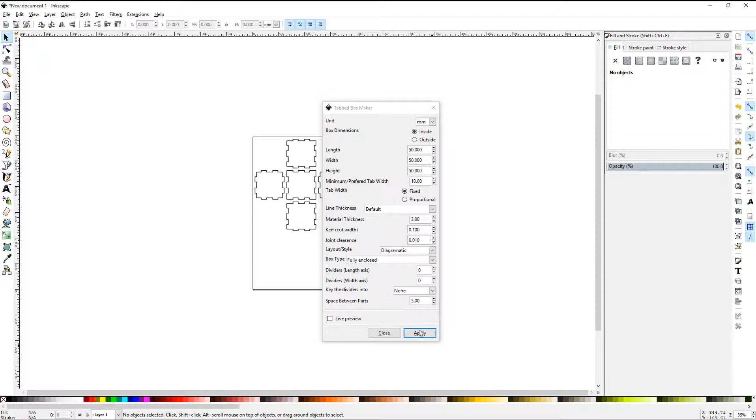So if I were to come here and make them a little further apart on the graphic, it's fine. I hit apply, and it made my box. So as you can see, there are 6 sides to the box.

Now I've already made the rest of the box, so we're just going to make a lid for this example - actually it really doesn't matter, but yeah, we're going to make a lid. I'm going to delete these other ones, and then - missed one. Come on, it's always the last one that gets you.

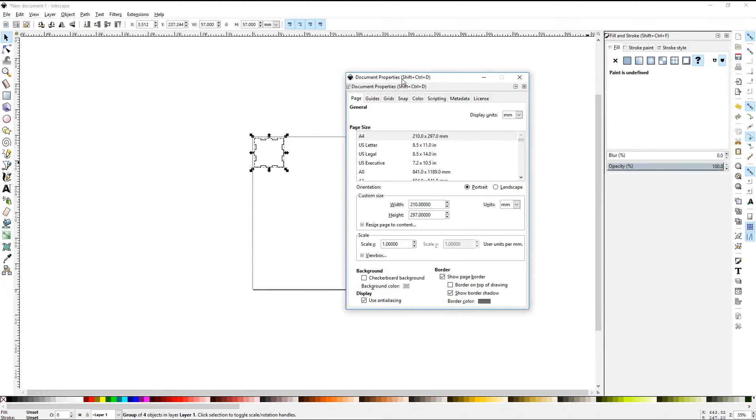So what I'm going to do is select this all, and right click it - I have to click on the line itself - and group that so I don't have to worry about it too much. I'm going to drag it over here, and then make my document the same size as the image. So I'm going to resize page to content, and now the whole document is the size of this thing. We're going to zoom in a little bit.

There's all kinds of alignment tools, and we're not going to get into the more advanced things about this - I'm going to do it just kind of quick and dirty. Basically what happens with the laser cutter is whatever is black will be raster engraved, which means it does a line pattern back and forth and engraves. Whatever is blue is going to be vector engraved, so if you have really cool, intricate vector outlines that are scalable, you'd put it in blue. And whatever is red will be cut.

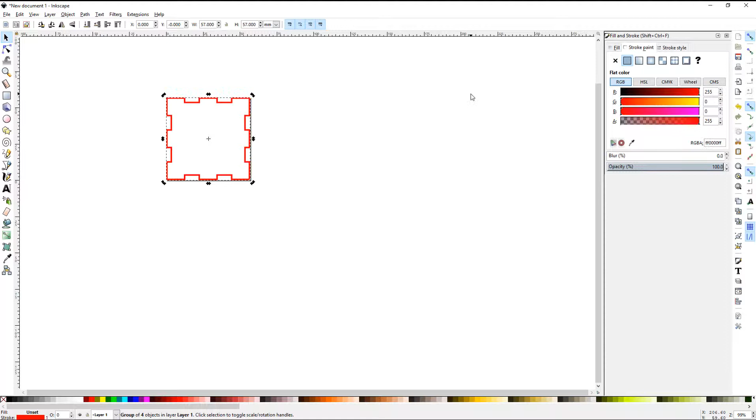So as I select this thing, I'm going to come over here to the stroke paint, and right now it's not set to paint anything. So I'll click it on here and change this to 255, and now this is red. So when the K40 Whisperer software sees this, it knows this needs to be cut out. There are other ways to do alignment, but I'm just going to do something really quick.

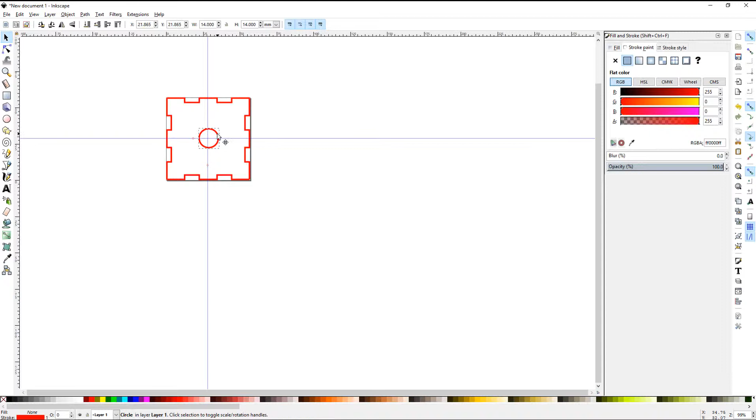I'm going to drag these bars in from the side, get my circle tool, and start making a circle. It doesn't even have to be round. I want a 13 millimeter circle, so I'll tell it the radius X and radius Y are both 6.5 millimeters, which gives me 13 since I'm talking radius, not diameter. So I'm going to drag this here and roughly center it up.

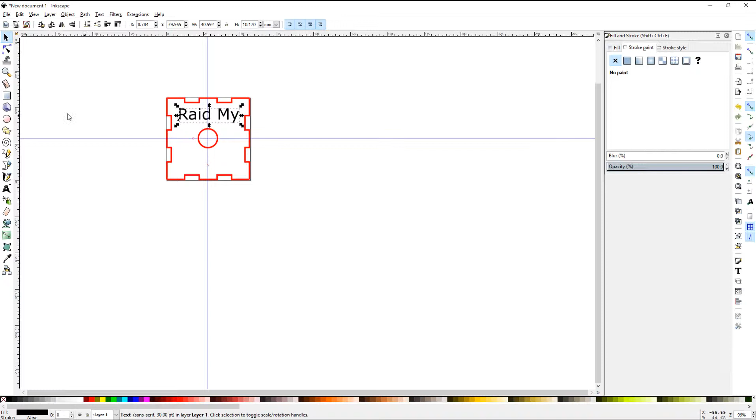It's pretty good. Then I'm going to take my text tool and type in 'raid my.' There's all kinds of things to center the text, but we're not getting real fancy here. I'll put that there, copy it, come back down, drag this one, and type in the word 'lab.' Then I'll drag that over and center it up. Yeah, that looks pretty good.

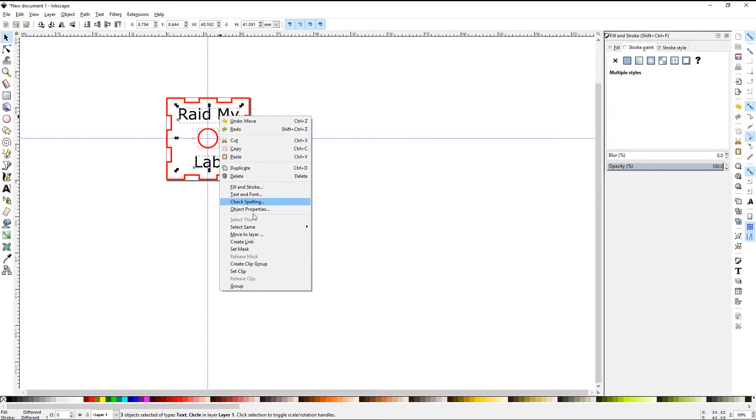There's ways to do different things with layers. For me, it's just about as easy to come in here and take this, this, and this, and group those together so I don't accidentally move them. And I'm going to delete them.

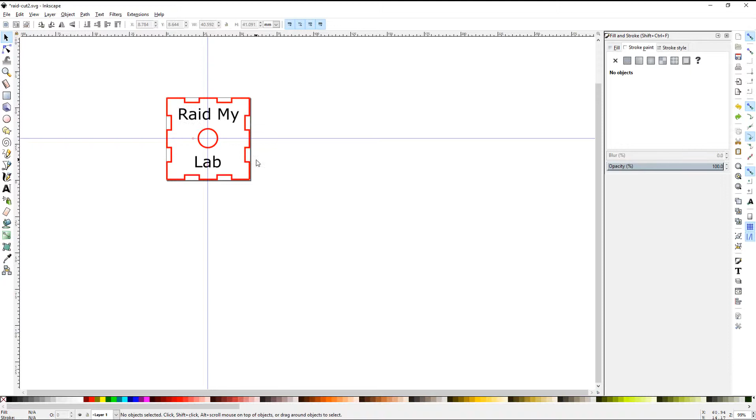I'm going to save this as RAID cut 2. Then I'll Control Z to bring that stuff back in, delete this other part, and save it again as raid cut 1. So what's going to happen is I'll tell it to engrave this part, then cut this part, then cut the outside, and then I'll have my box.

Now I'm in the process of setting up my air assist, which will clear out a little bit more of the smoke. So I'm going to use a little tube to keep it out of the way to give you guys a better shot.

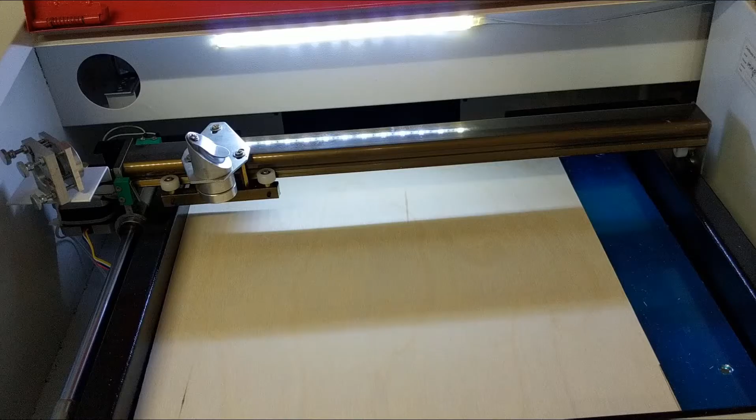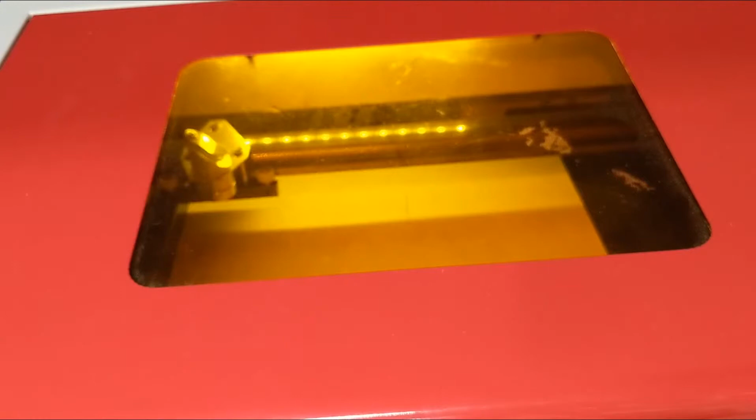Okay, so I've got a piece of wood in the laser cutter, and I don't have the smoke assist turned on, so it might be a little smokier than normal. But we're going to close the lid, and then I'm going to come in here and tell this thing to initialize the laser cutter, and then tell it to print.

You can see the thing pretty much goes back and forth like an inkjet. There's a fan sucking the exhaust outside. It gets a little bit of turbulence in there, so it builds up a little bit of smoke, but you can see it's just working like a basic laser printer.

I'm going to hold you up here so you can get a view from the top.

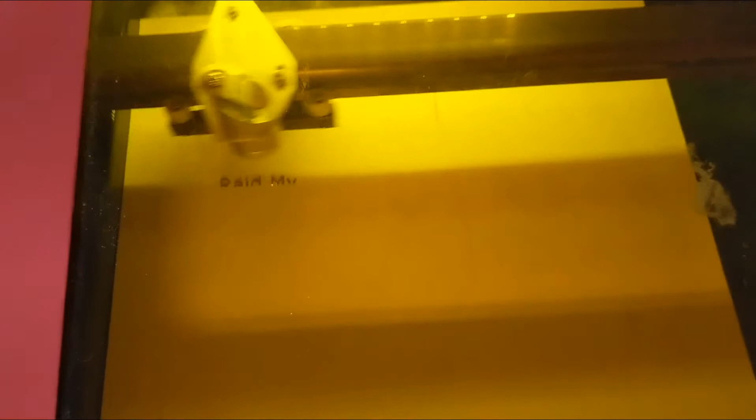Okay, I'm going to leave the lid open for the next two parts because I'm going to use a little bit of air and some pump to allow you to see a little bit better. And I am wearing laser glasses to protect my eyes, so I'm just going to go ahead and fire this thing up and tell it to cut.

You can see it just fires right up there, and cuts that hole right out.

Now, ironic, oh yeah, it fell. Now, I should not have picked that up because I just lost my alignment here, but we can still see right about where it cut, and we're going to get it close enough.

So now the next thing I'm going to do is load the other design file. Okay, so let's cut the outline. It's not going to be perfect because I picked up the piece, but that's fine.

Now there are things you can do, like put some tape on top if you're worried about that charring. You can also adjust it. I could be cutting faster at a lower power and do multiple passes, and there are all kinds of different tricks you can do to make things neater. I'm just giving you an idea of the basic way it works.

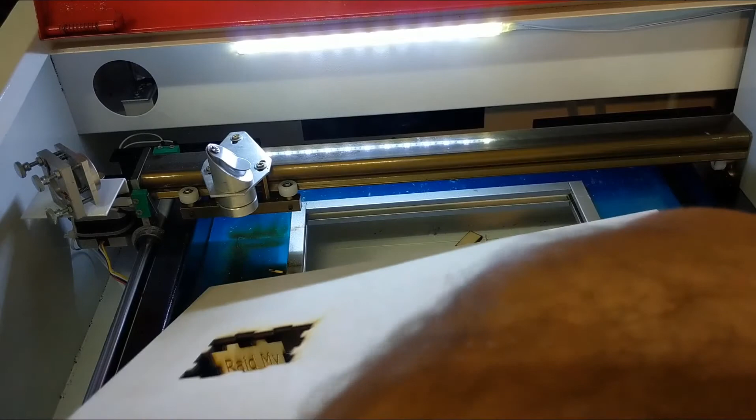I can't see my own screen. Raid my lab. There we go.

So I've laser cut a box, as you probably have seen already in the video, that this whole thing is going to go in. And so we're going to put it in there. This thing's not going to have a whole lot of stress on it, so we don't have a lot to worry about. So we're going to drop it in.

I may have to get in there with some kind of tool to tighten that, but I think we should be able to get it good hand tight. Now again, I like to have a lot of extra slop in here. I like to have a lot of extra room to be able to take this apart later. In fact, I don't even know if at most I'm going to put a little glob of glue to keep the bottom on this case.

I'm a big fan, I think right now I'm using Gorilla Glue in the glue gun that we'll be using in a second, and it is some tough stuff. So we should be pretty good.

So we're going to hook this up to ground. Doesn't matter which one's which. And the other one to D3, and then just to keep it honest in there, I'm going to put just a little glob of glue.

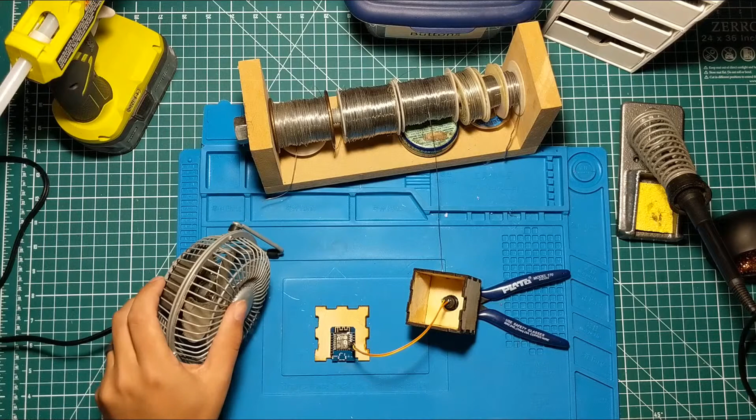Now, one tip I have for this, as the Brits would say, one top tip is I bought this little fan at a yard sale for 50 cents, and it is, again, fan-freaking-tastic for allowing this stuff to cool down. Now, I'm not going to make you sit here and watch glue dry, but know that I'm doing it faster than the average YouTuber because I have my 50-cent fan.

Now, I did wind up cheating that back about 3 mil just to give a little bit extra space on it. But I'm actually using the edge of this circuit board as a little bit of tension, so I didn't even bother gluing this thing. It just kind of stays on with its own tension.

It's laser cut pretty tight. So this is the unit. Got the little USB cord area, got the Raid My Lab button, and we are in business.